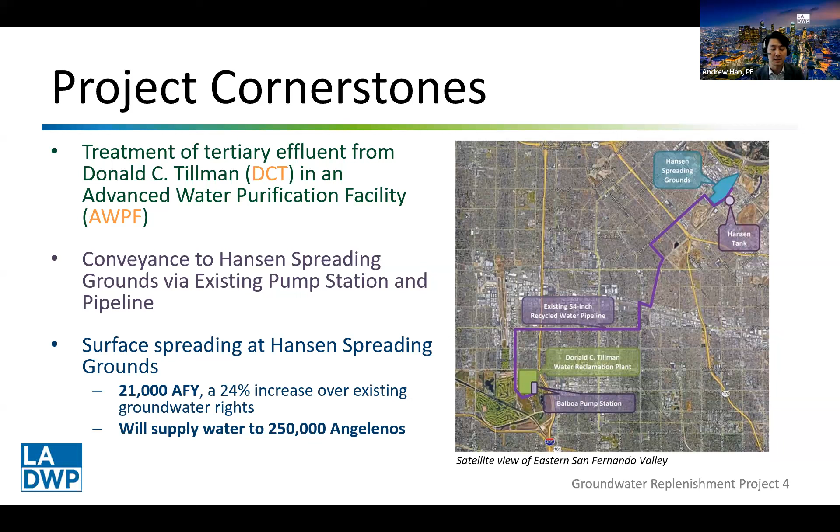At the Hansen Spreading Grounds, the project will spread 21,000 acre-feet per year of advanced purified drinking water from the AWPF, a new drinking water supply for 250,000 city residents. Once spread, the advanced purified recycled water will replenish the San Fernando groundwater basin.

As many of you are aware, the city of Los Angeles and Southern California as a whole has historically relied heavily on imported water sources. Of the local water supply sources available, groundwater is paramount, and of the groundwater basins available, the San Fernando groundwater basin is the city's principal groundwater resource. It is capable of providing up to 23% of the city's total water supply during dry periods. Therefore, replenishment of this basin is critical to increasing resilience of our local water supply.

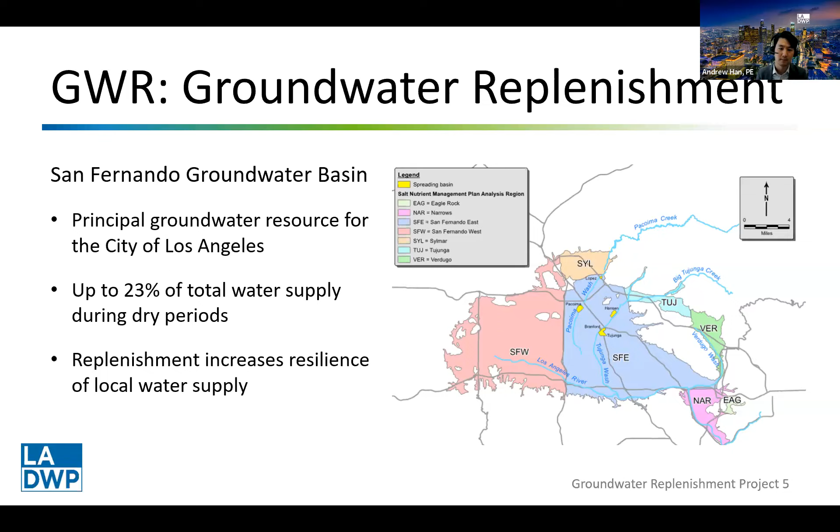The concept of groundwater replenishment for the city of Los Angeles is not necessarily new. In the 1990s, the city pursued the East Valley Water Recycling Project, which at its core looked very similar to our LAGWR project. We were going to take water from DCT, convey it across the San Fernando Valley, and spread it at the Hansen Spreading Grounds. We actually finished construction of the East Valley project.

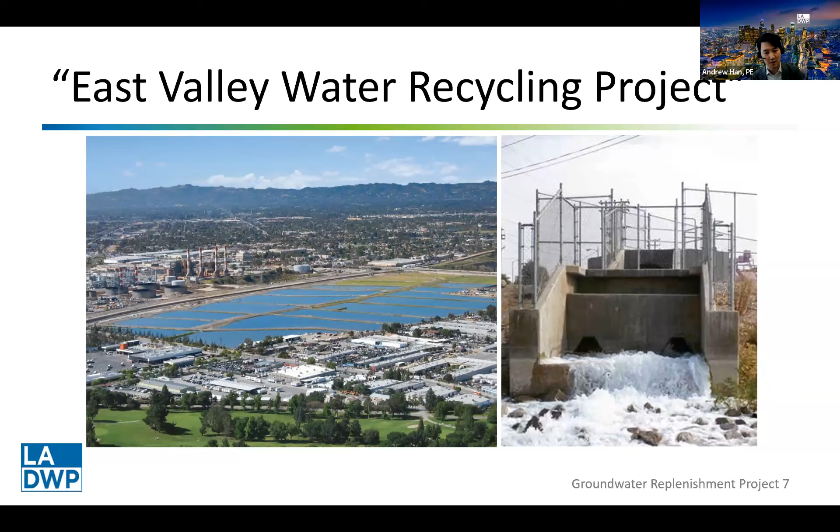The conveyance pipeline I mentioned and showed you on the map is the same pipeline that was constructed in the 90s. However, before we could spread a single drop of water from the East Valley project, the project was embroiled in the politics of a mayoral campaign, hit with article after article opposing it, and was ultimately shut down.

So the city went back to the drawing board. Over the course of more than a decade, we performed a series of studies, pilots, and planning reports, in conjunction with extensive outreach and stakeholder engagement, that established the LAGWR project as what it is today: a potable reuse project that goes above and beyond regulatory requirements to ensure public health and trust.

To further solidify that trust with the public, the city also engaged extensively with an independent advisory panel. This panel was first convened in 2010, before regulations were even available to the department. We've continued to engage with the IAP over the years and will continue to do so as the project progresses. This engagement with the expert panel is something we've leaned on heavily with our outreach and stakeholder engagement, to make sure we're getting as much support and buy-in from the community and stakeholders as early as we can.

Now, with the planning complete, the LAGWR project is in design, and it's being implemented via progressive design-build, with Jacobs serving as our primary progressive design-build contractor. The project is being implemented as a partnership between LADWP and LA Sanitation and Environment, supported by our owner's agent team consisting of Carollo Engineers, Trussell Technologies, Woodard & Curran, and Hazen & Sawyer.

Now, with that general overview of where we are and how we got here, I'll hand it over to Sebastian and Michael to take you through the finer points of the project itself.

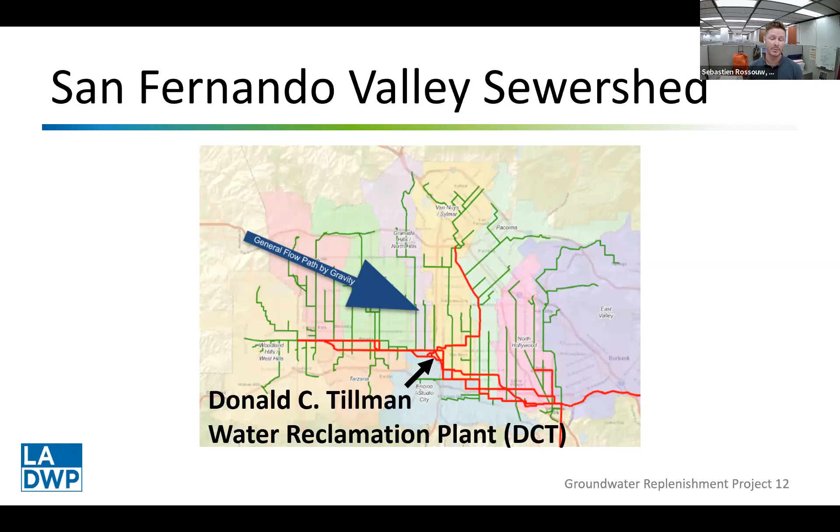Let's talk about the treatment processes at DCT briefly. DCT has primary treatment, primary clarification, followed by secondary treatment, conventional activated sludge followed by clarification, then tertiary filtration and chlorine contact tanks. As scientists and engineers, we're probably building that process flow diagram in our heads now. We see the water coming through DCT, going through primary, secondary, and tertiary treatment, and at that point it departs to the AWPF for further treatment.

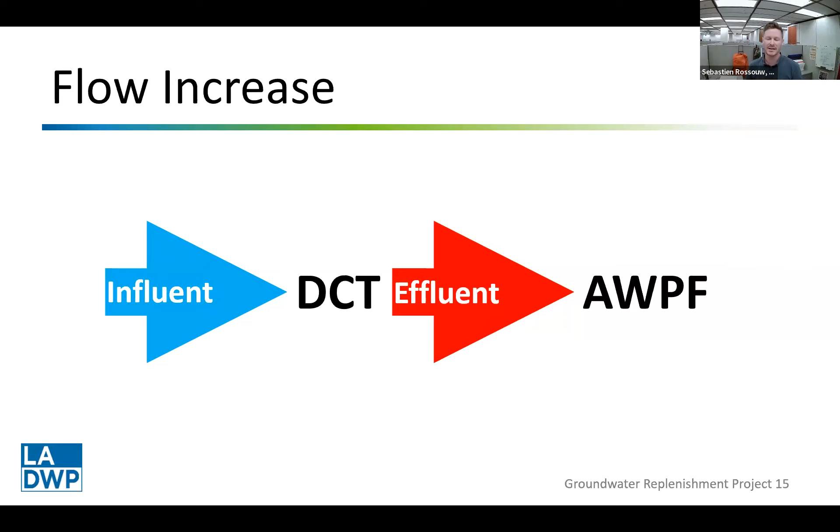The first improvement we made at DCT was to drive additional flow to DCT. That's because influent to DCT is proportional to effluent coming out of it, and that is the influent for the AWPF. So by increasing influent to DCT, we're effectively increasing the effluent coming out of it and increasing the capacity of our AWPF. We want to produce as much recycled water, as much purified water as possible.

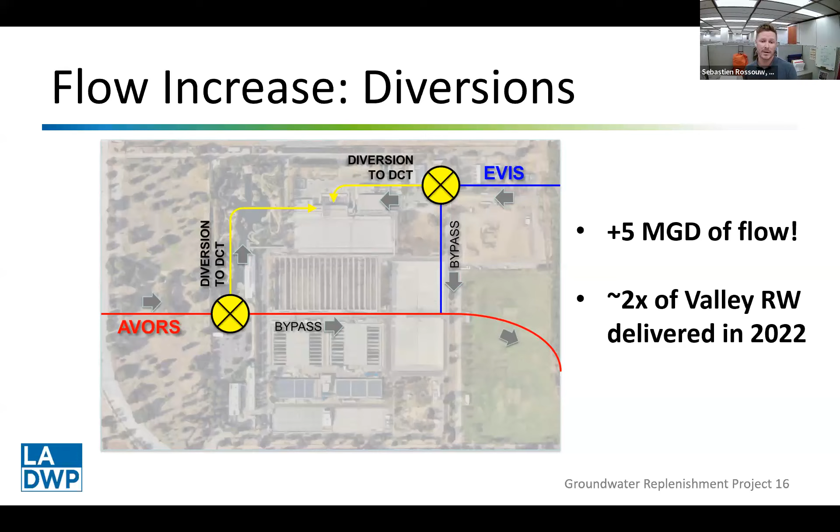This effort involved maximizing diversion to DCT and minimizing bypass. It yielded 5 MGD of flow, and to put that in perspective, that's almost double all of the recycled water delivered in the valley in 2022—a fairly significant number for us.

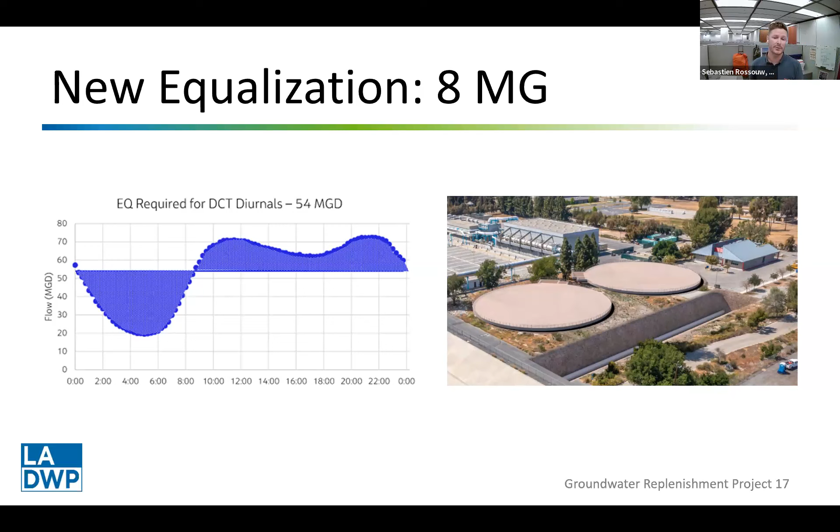Looking at this plot on the left, there's a horizontal line representing the daily average. Any volume of flow coming into the plant above that daily average will be diverted to the EQ basins and stored there. Then when flow falls below that daily average—in this case 54 MGD—the EQ basins will release flow into the plant, creating nice even flow throughout the plant, which has its benefits, and even flow downstream into our AWPF.

Another DCT improvement is the idea of optimization. Why are we interested in optimizing unit processes within DCT? Back to our simple schematic visual: let's think of influent as steady, and examine the relationship between waste flows and effluent coming out of the plant. If you have significant waste flows, you'll have an average amount of effluent coming out of the plant, but if you can minimize these waste flows, you'll maximize the amount of effluent coming out of the plant and therefore into the AWPF.

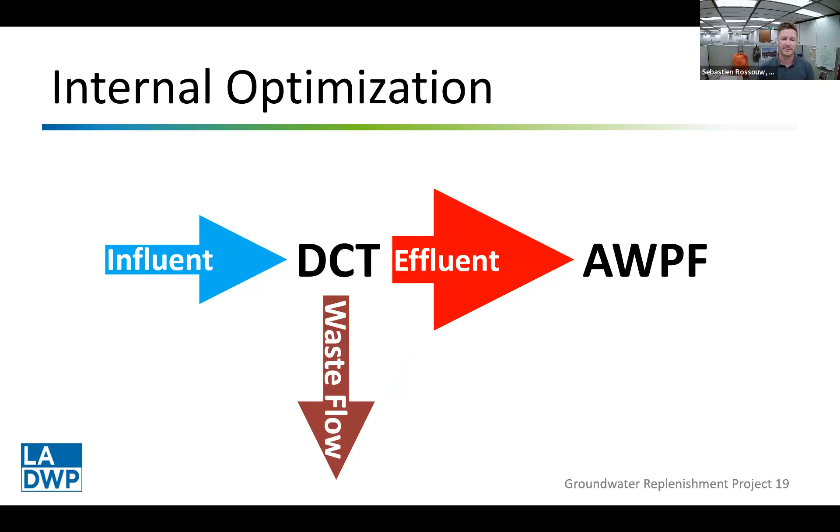And what we're doing there is handling a sprayer system, a prototype we created to help optimize scum removal in the secondary clarifiers. So as a scalping plant, there's been no driver historically to optimize and conserve flows within the plant, but now it's in our best interest to do so. This effort allowed us to save about an MGD of water.

Specifically, about 1 million gallons per day of water was going to go into the sewer system, but now instead that's going to continue throughout the plant and ultimately make its way to the AWPF.

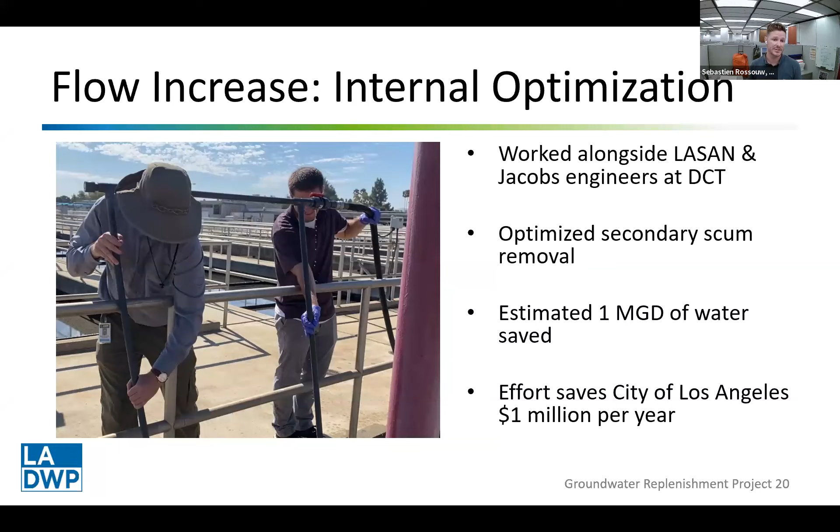Put in other terms, this will save the city of Los Angeles about $1 million per year. But enough about DCT, let's talk about the star of the show, the Advanced Water Purification Facility.

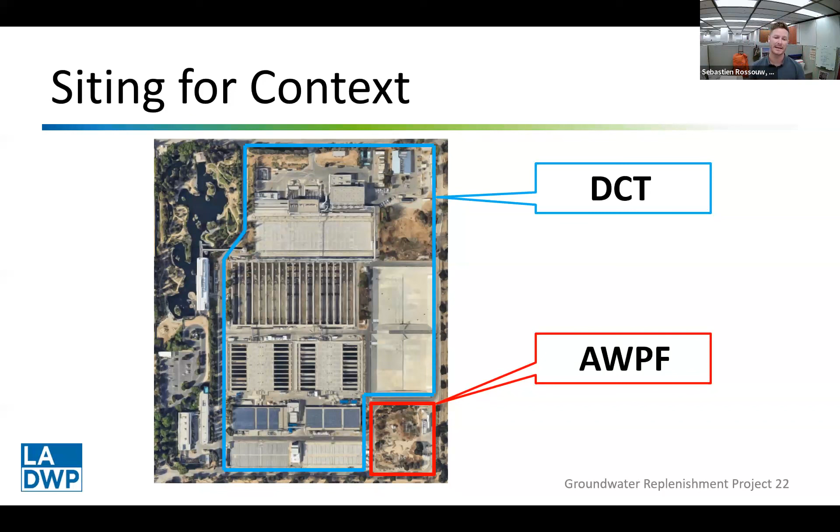Here's a beautiful rendering of what the building for the AWPF will look like. But of course, as scientists and engineers, we're probably much more interested in the treatment train within. So let's talk about that.

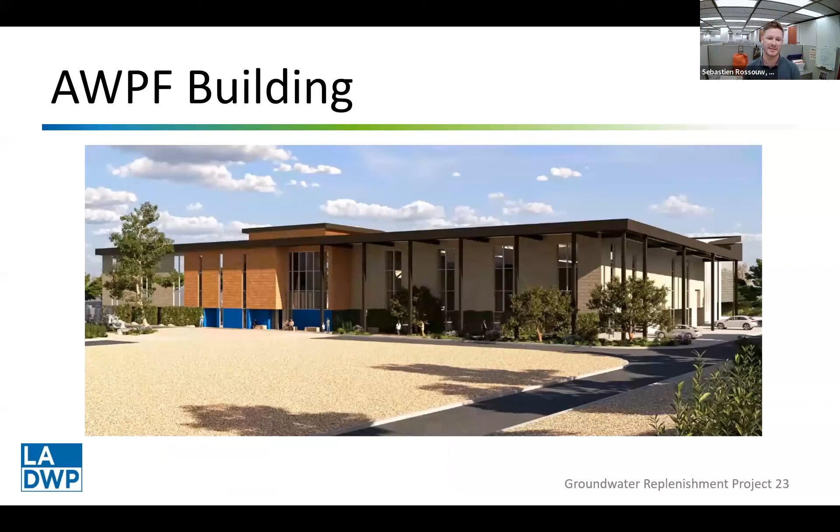The treatment train being used here is known as full advanced treatment, or FAT, associated with another bunch of acronyms: MF, RO, and UVAOP. Let's unpack those one at a time.

The first is microfiltration. That can filter out suspended solids, organics, and pathogens, and its purpose is to prevent fouling of the much more finely pored downstream reverse osmosis membranes.

Now, where microfiltration is capable of filtering out suspended solids, the RO membranes can actually filter out dissolved solids, including critically the contaminant of emerging concern, PFAS.

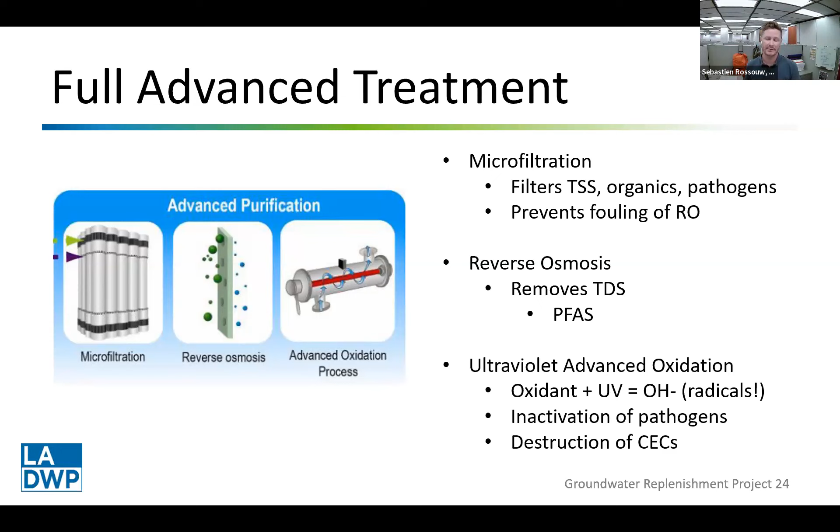And then we have the star of the show, the ultraviolet advanced oxidation. The way this works is we dose an oxidant, in this case sodium hypochlorite, on the way into the chamber. Once in the chamber, it's bombarded with energy in the form of UV light. This forms very short-lived hydroxyl radicals that are very reactive, and they drive the inactivation of any remaining pathogens, as well as the destruction of CECs.

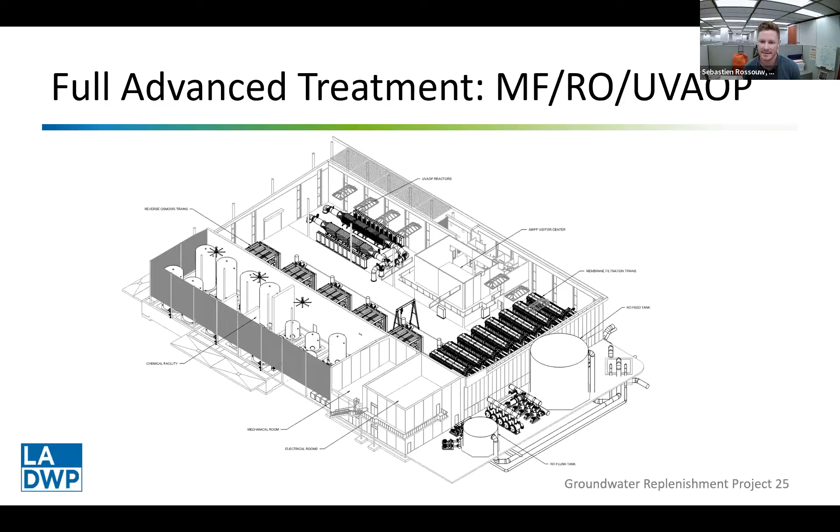I'm going to round this out with my favorite drawing from this project. This is a nice isometric drawing of the internals of the entire treatment train of the AWPF. We can see here all the things we've just discussed: the microfiltration, followed by the reverse osmosis, and finally the ultraviolet advanced oxidation process.

We've been talking a lot about the science involved here, but it's very important to speak about the science to the broader public. So we have a public learning center that's central to the facility, getting rid of some of the stigma and really educating the public about what's happening here, and maybe inspiring the next generation of process and water resource engineers who can take up this good work once we all retire.

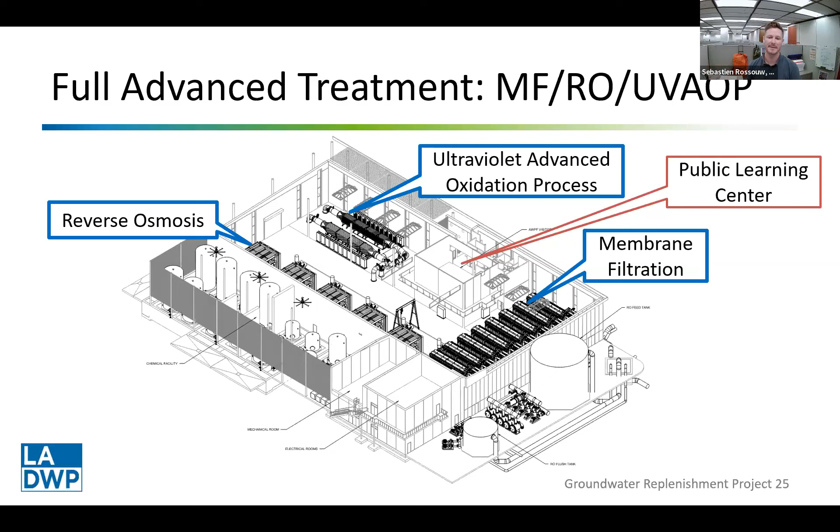Hey, thanks, Sebastien. That was a wonderful walkthrough of the AWPF, and thanks, Andrew, for giving us the overview of the project. So now I'll be presenting on some of the more downstream aspects of the project.

So we walked through the DCT, the AWPF. Now imagine that the purified recycled water is treated, left the AWPF, been conveyed, and now is arriving at the Hansen Spreading Grounds. Like Andrew mentioned earlier, the Hansen Spreading Grounds is owned and operated by County Public Works, located in the eastern San Fernando Valley.

Its primary function is to infiltrate impounded stormwater that's captured behind dams in the mountains surrounding the San Fernando Valley. Once that stormwater is impounded behind those dams to prevent flooding in the area, the county discharges it into several spreading basins around the San Fernando Valley to infiltrate into the groundwater basin.

There are improvements required at Hansen Spreading Grounds in order to discharge purified recycled water at this location. The objective of these improvements is to increase operational flexibility to allow water to be discharged into different locations in the spreading basin, and also to have flow monitoring and control at this location, because County Public Works will be discharging the water and controlling where it goes into the basin.

We want to make sure that they can have the flexibility to operate around their regular maintenance and any basins that do not have available capacity for recycled water.

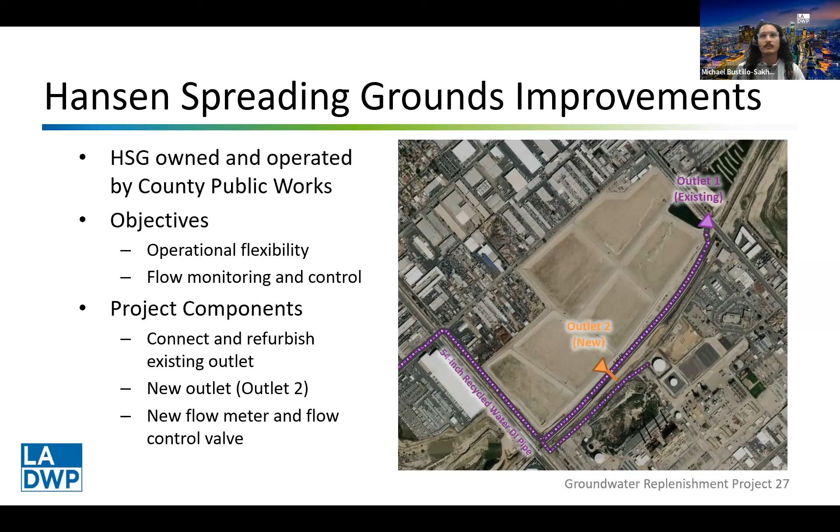The second facet here is a new outlet lower down into the basin, allowing water to be discharged into basins that may not be full of stormwater, or may need to be dried to manage vector control. Finally, a new vault with flow meter and control valve will be installed to divert flow between either outlet.

So before the water can actually be discharged here at Hansen Spreading Grounds, we need to have regulatory approval. I'll be talking about regulatory approval specifically for recycled water. In California, you may hear the shorthand Title 22 thrown around a lot when talking about recycled water. Those are the regulations that govern discharge and use of recycled water for potable reuse in the state.

The agencies that enforce those regulations include the State Water Resources Control Board and also the Los Angeles Regional Water Quality Control Board. The regional board has a service area that roughly covers southern Los Angeles County and the majority of Ventura County.

The State Water Board is charged with protecting public health and also regulating drinking water systems, while the Los Angeles Regional Water Quality Control Board, which I'll just refer to as the regional board, protects surface water quality and groundwater quality. They write permits on behalf of the California EPA and the US EPA for any kind of industrial discharge or wastewater discharge into the area.

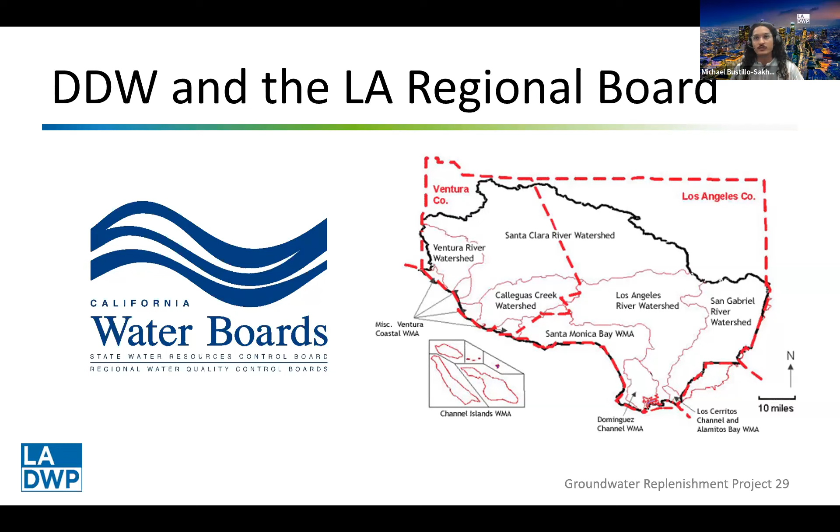The State Water Board provides a lot of technical support to the regional board on the specifics of recycled water use, and a lot of their recommendations get written into the permits that we work with, provided by the regional board. So in order to have this project go into operation and produce and discharge recycled water, there's a lot of coordination that needs to be done with these agencies.

If you remember back to the timeline with the IAP, going back to 2010, there was a lot of coordination with the regulators and the independent advisory panel. Now I want to focus on the coordination that is going to be conducted as part of the project itself.

To date, since March 2023, working on LAGWR design, we've been compiling our Title 22 engineering report, which was submitted as a first draft in October of this year. That report contains all of the information on how we are going to meet the regulatory requirements for producing purified recycled water and discharging at the Hansen Spreading Grounds.

That'll probably go through a few rounds of submission and feedback before we receive a conditional approval from the state. That conditional approval will allow the regional board to begin writing our permit for discharge, laying out all the requirements for monitoring, reporting, operations, and what to do in case of any mishaps. We'll also need to develop a tracer test plan, which will certify the results of any groundwater modeling required for this groundwater replenishment project.

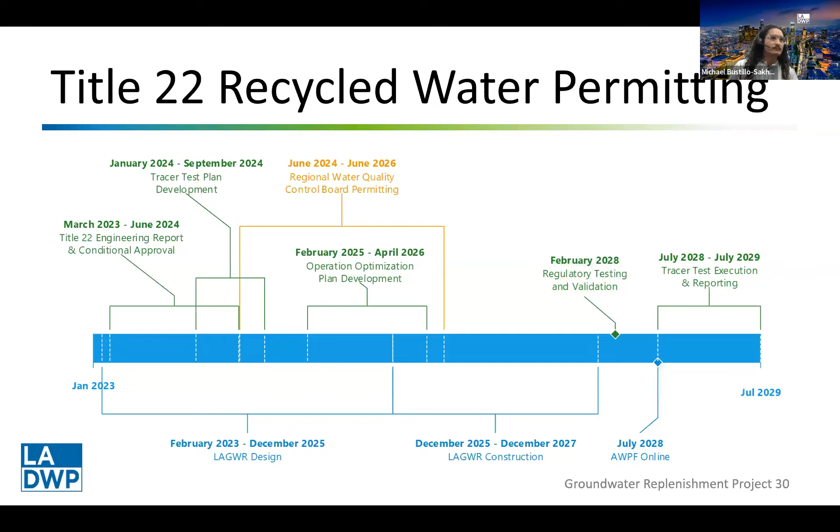So now I'd like to talk a little more about some of the other aspects of the regulatory approval, and that's groundwater basin modeling.

This is a groundwater replenishment project. San Fernando Basin is an integral part of this project. So as that water infiltrates from the Hansen spreading grounds, it'll travel into the aquifer, and then we'll extract it at drinking water wells down gradient.

So a groundwater model is important because we need to find out three things, or we need to be able to assure ourselves of three different things.

We want to know the retention time in the basin, because that allows us to determine pathogen removal and inactivation, and also meet requirements for minimum retention time imposed by the state. If we can reach a minimum of about 6 months of groundwater retention, we can get removal credit for virus, Giardia, and cryptosporidium, and also be allowed to extract the water and use it for potable reuse.

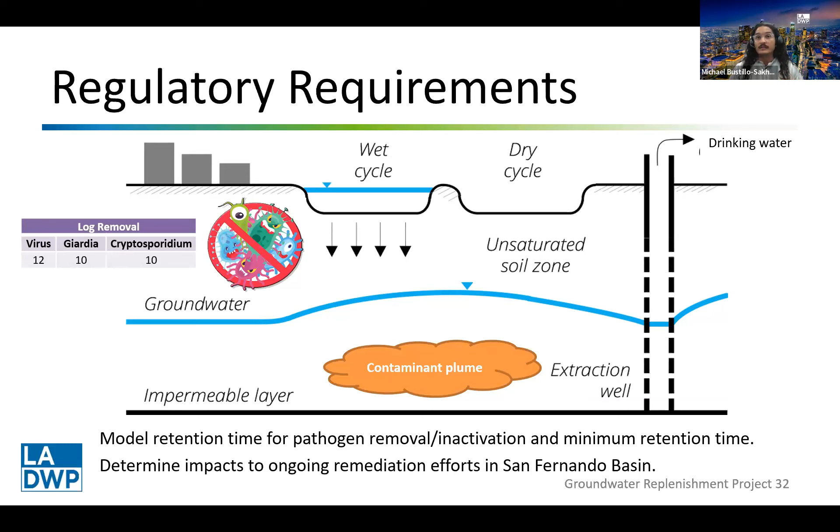Now, the final item here is we want to make sure we're not impacting any ongoing remediation efforts in the San Fernando Basin. So I have this cartoon contaminant plume here between the replenished water and the drinking water basin. The eastern San Fernando Valley has a lot of legacy groundwater contamination from industrial activities, and the state board and lots of other parties have been involved in remediation efforts and designing remediation facilities. We want to be certain that this 21,000 acre feet of water being introduced into the groundwater basin is not going to impact any of those remediation efforts.

So we're planning on starting replenishment late 2027, early 2028, for the sake of this modeling.

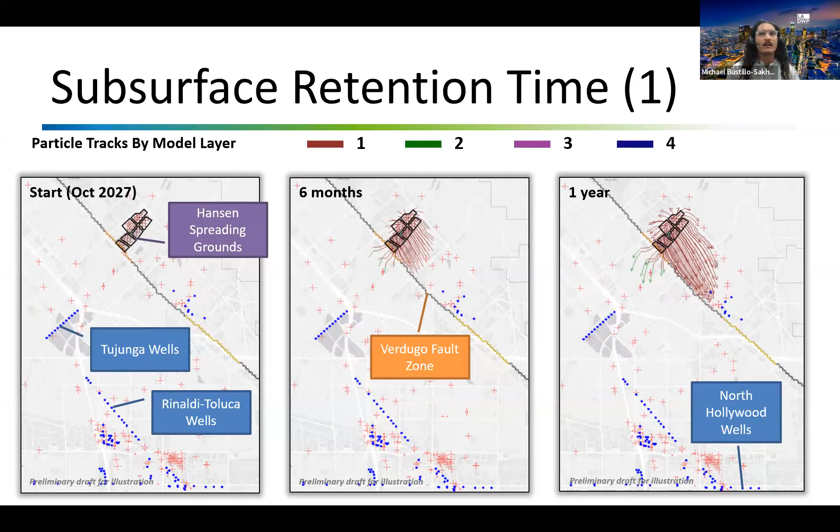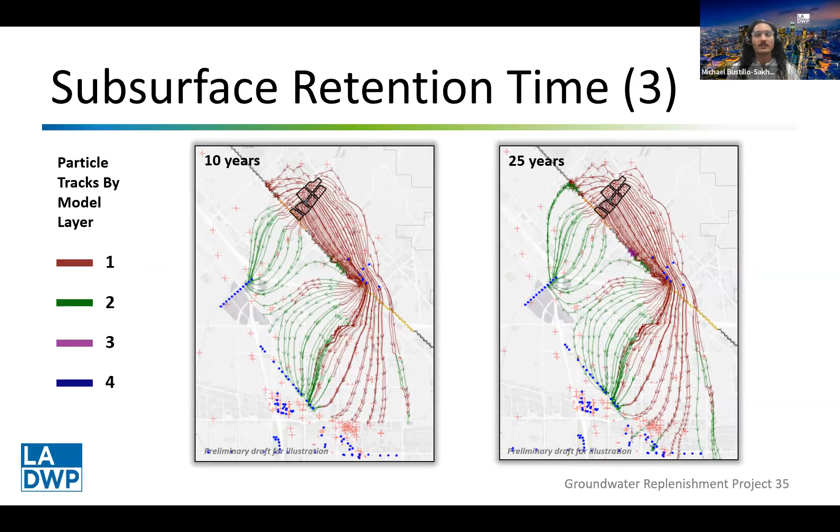Going a little further in time, after about 10 years, we can see that a lot of the water has begun to be captured at the extraction wells. And at 25 years, about 95-98% of all the water that's infiltrated will actually be extracted by wells, with only a small percentage remaining in transit.

So injection wells, why are we talking about injection wells? I thought we were talking about surface spreading and the Hansen spreading grounds. Well, there's one small challenge with this project: the Hansen spreading grounds is not owned by DWP. It's owned by the county public works, and their primary function is to impound stormwater.

So there are seasons, and there is the potential for extremely wet seasons where there is no available capacity at the Hansen spreading grounds. If anybody here in California can recall this past winter, we saw record rain and record snowpack, and there was no available capacity at Hansen spreading grounds for a couple of months. That means about 2 months where we can't spread any purified recycled water from the AWPF.

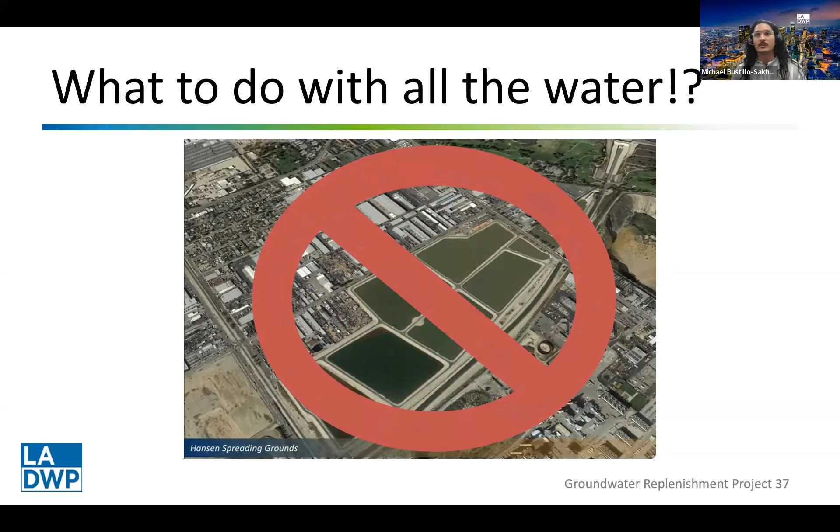That has lots of operational impacts. We also want to maximize the amount of water that we're producing and infiltrating so that we can have a resilient water supply here in Los Angeles. So the solution here is to install injection wells that we can use either seasonally or year round.

The department has never utilized injection wells to replenish groundwater before, so we are embarking on a years-long injection well pilot. Hopefully it will graduate into an actual injection well field where we can inject water from the groundwater replenishment project.

The regulatory aspects here will likely have to be repeated for this new discharge of the recycled water. This will essentially repeat a lot of the coordination and make it such that this project can utilize all of its water at any point in time.

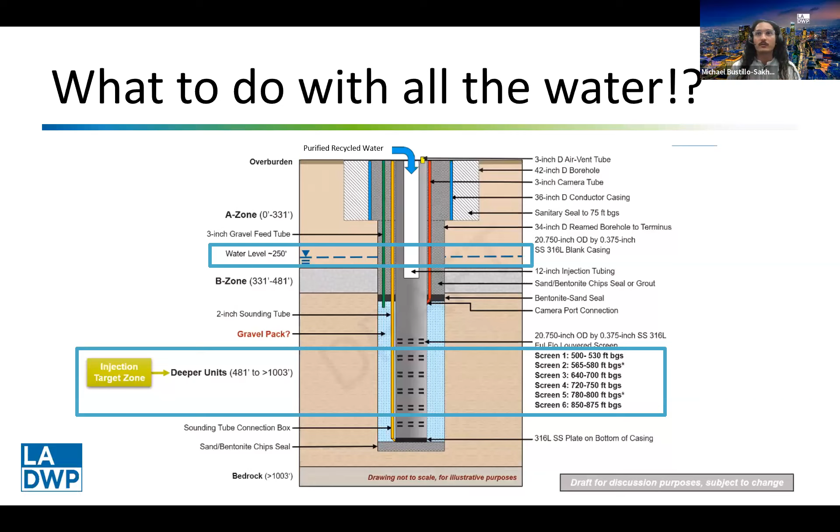Thank you, Michael. Thank you, Sebastian. So now we've shown you all this work that we have done and need to do, frankly, throughout the San Fernando Valley. So now you're probably asking the question that we ask, or we get asked by the public all the time: how long is it going to take to do all this, and how much is it going to cost us?

The project is currently within the design phase, with the big ticket item, the AWPF that we've talked about, dominating the schedule. With everything on schedule as it is currently, we'll start 3 years of construction for the AWPF at the end of 2024. By the end of 2027, the AWPF and all the supporting facilities we talked about will complete construction. So in 2028, we'll be producing advanced purified recycled water and replenishing the San Fernando Basin.

And in all the work that we talked about at DCT, at the AWPF, and at the Hansen Spreading Grounds, all this will cost just over $700 million.

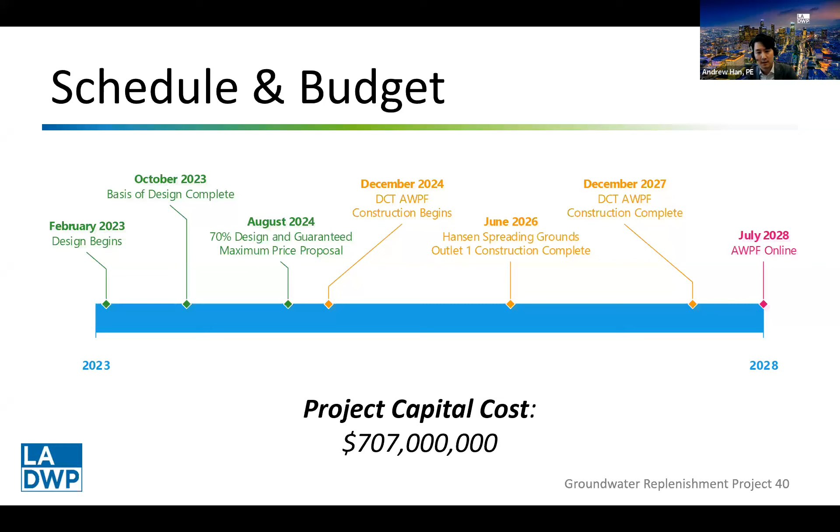Now, I won't go into the immediate project benefits of this all over again, but I did want to take a step back and highlight for you what this means for the city and its 40-year recycled water program, and frankly, why we're so excited about this project.

This project represents a doubling of the city's existing recycled water program. This is the largest recycled water project the city has tackled to date. But this won't be our largest for long. And that takes us to reason number 2.

The LAGWR project is a major step by the city into potable reuse, and it sets the stage for another City of LA initiative that you may have heard of, Operation Next, which at completion will be the largest potable reuse project in the state of California. The lessons learned from the LAGWR project will feed into a stronger Operation Next.

As I mentioned, this is just a first step for the city, and we have a lot of work and innovation that'll be required of us in the years to come. So we're always looking to the industry on how we can learn and improve as we move towards a successful LAGWR project and a greater Operation Next.